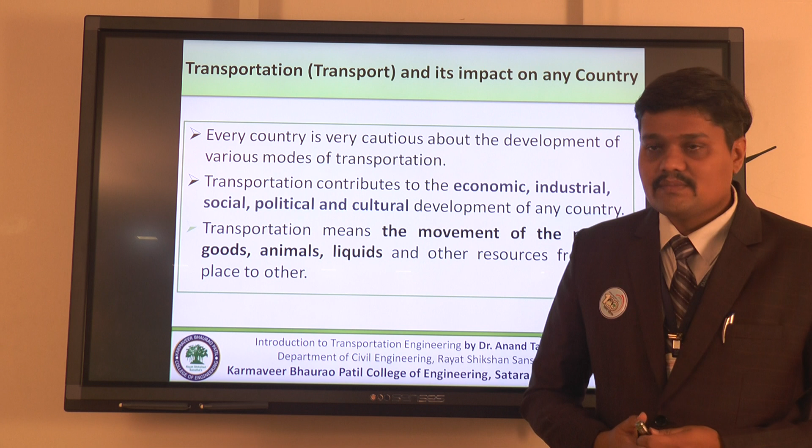We people often drink tea, we drink coffee, we export a number of things, we import a number of things to the state, to the districts, to the country, world over. Do you know exactly what transportation stands for? We all should know what exactly transportation means. It is the movement of people, goods, animals, liquids and other resources from place to place.

Well, I was talking about drinking tea in Satara district. We all are aware that tea, the main product, originates from Assam, and we are having it in Satara district of Maharashtra state. Likewise, there are a number of things that we are exporting from the state of Maharashtra, from our country to other neighboring countries. Ultimately, transportation contributes to the economic, industrial, social, political and cultural development of any country. So every country is very cautious about the development of various modes of transportation.

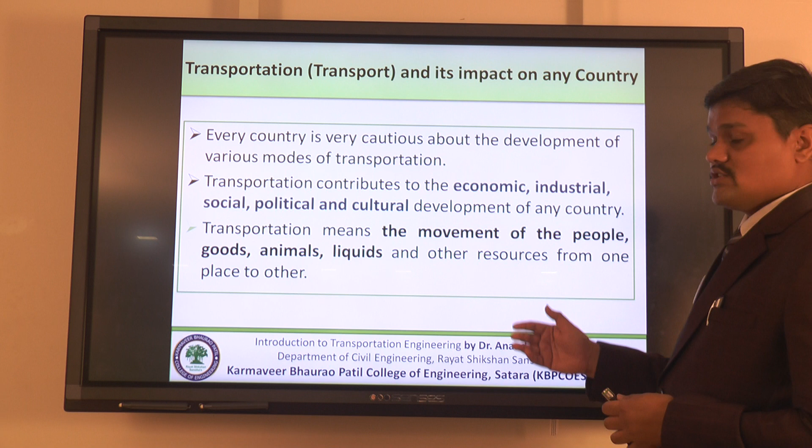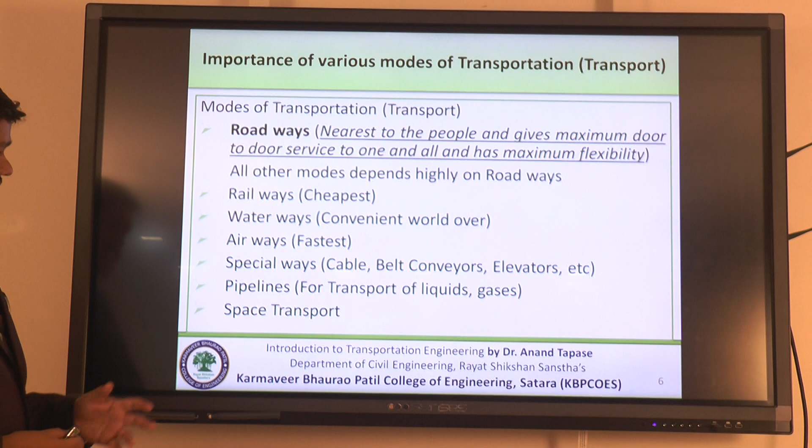Dealing with transportation, it has a number of different modes. To start with, we have roadways, we have railways, we have waterways, we have airways, and special ways like belt conveyors, elevators, cables, pipelines, and we all are aware about space transport.

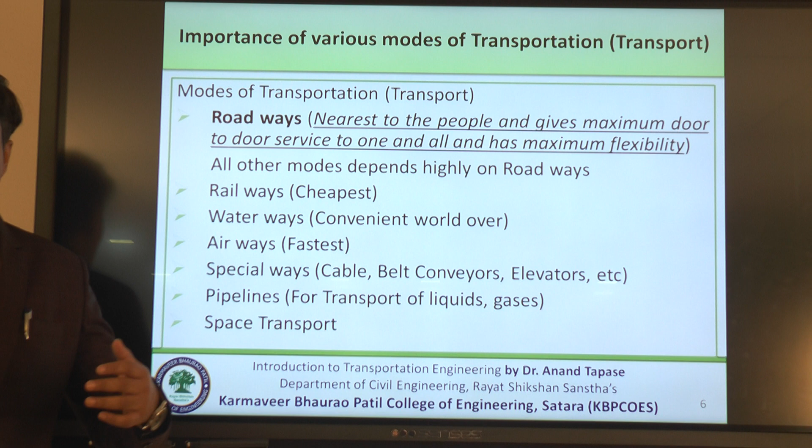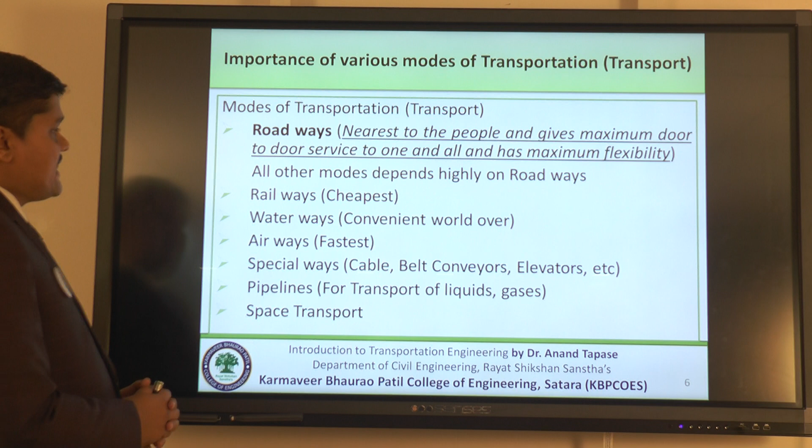Out of all the modes, we should recognize road transport as the most important mode of transportation, as all the other modes are highly dependent on roadways. If I want to go to China or America, I have to take a flight. If I have to go to another state like Delhi or Karnataka, I want to go by railway. It is impossible for me to hire a railway or an aeroplane from my house itself. So the basic need is road transport to the airports and to the railway stations.

So roadways are the nearest to the people and definitely the most important; it is the maximum door-to-door service provider and it has maximum flexibility.

Talking about railways, they can be elevated, surface, or underground. There are different forms of railways that today we are aware about. We are going towards the era of bullet trains. We have seen monorails. We are always aware about the general railways.

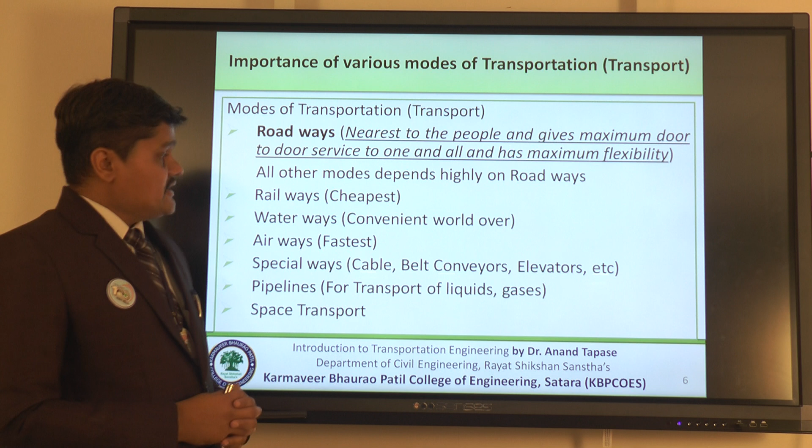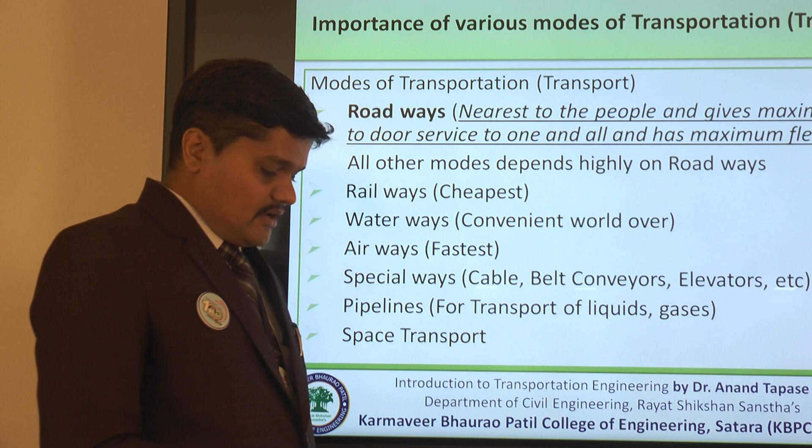The third one is the waterways. We all are aware that more than 70% of the globe is covered with water. We have a number of inland water bodies, and those water bodies can be used as a means of transportation. So waterway is one of the convenient modes of transportation worldwide.

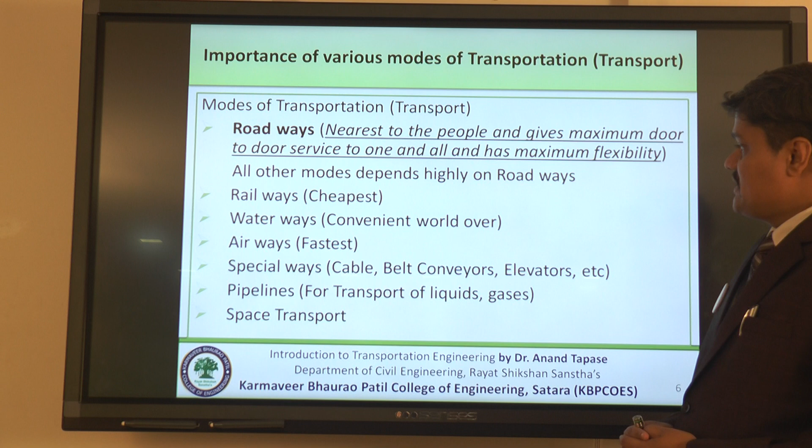Airways, definitely we cannot forget about airways. It is the fastest means of transportation. Special ways like cable, belt conveyor, elevators are designed for specific purposes. They are responsible for a particular locality.

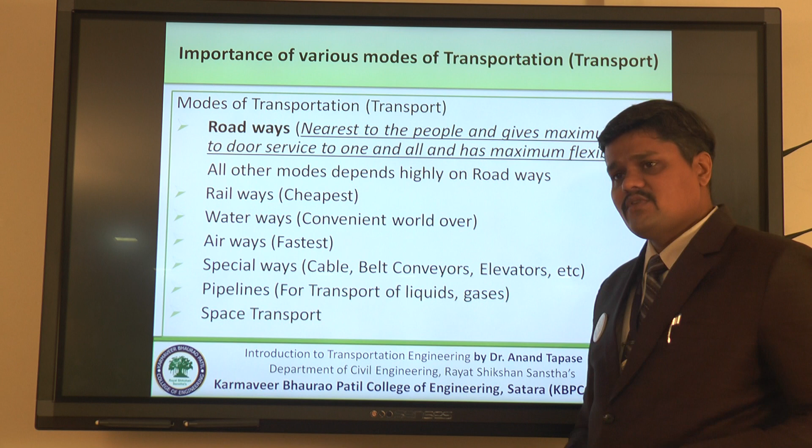Pipelines. We are talking about the various means of transportation where not only people or goods, we are also talking about the transportation of oil, liquids, gases and other aspects. So the pipeline is one of the major modes of transportation that covers the transportation of liquids and gases. Space transport we are definitely familiar with.

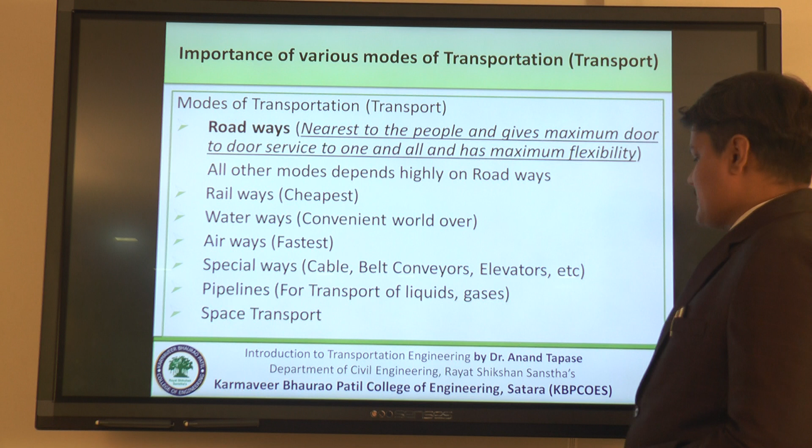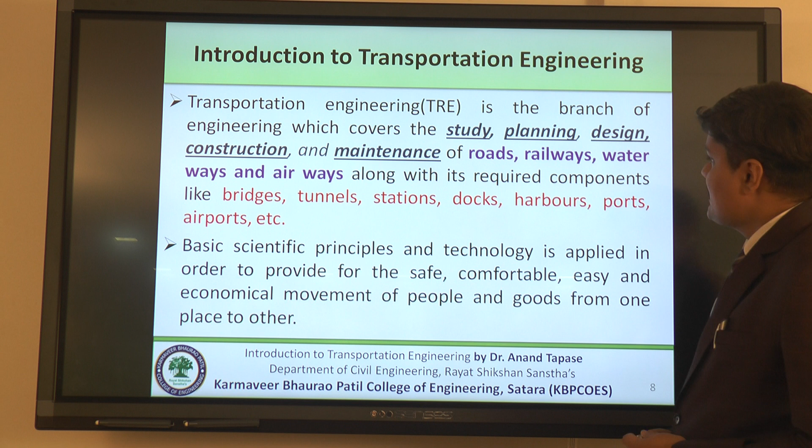In today's lecture, or as per the scope of our subject, transportation engineering, we will be focusing our attention specifically on highways. We will be dealing with the railways, we will be dealing with the airports. Likewise, what transportation engineering is and how transportation has relevance, we will discuss herein.

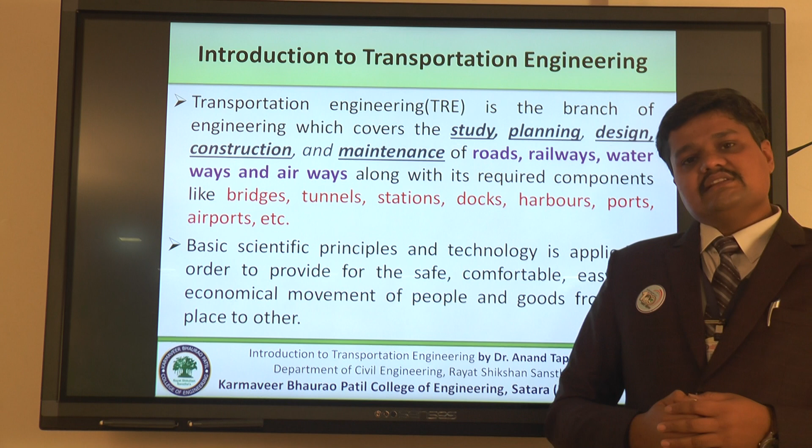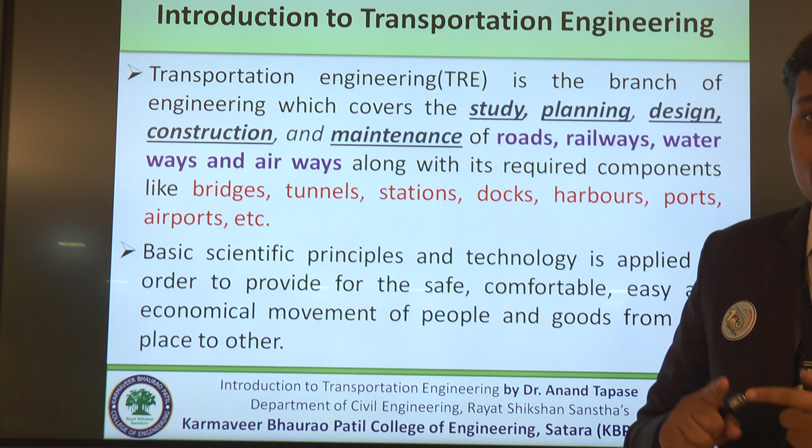What is transportation engineering? Transportation engineering is the branch of engineering which covers the study, planning, designing, execution, that we call construction, and the maintenance of roads, railways, airways, waterways, and the various ways along with the required components like bridges, tunnels, stations, docks, harbors, ports, etc.

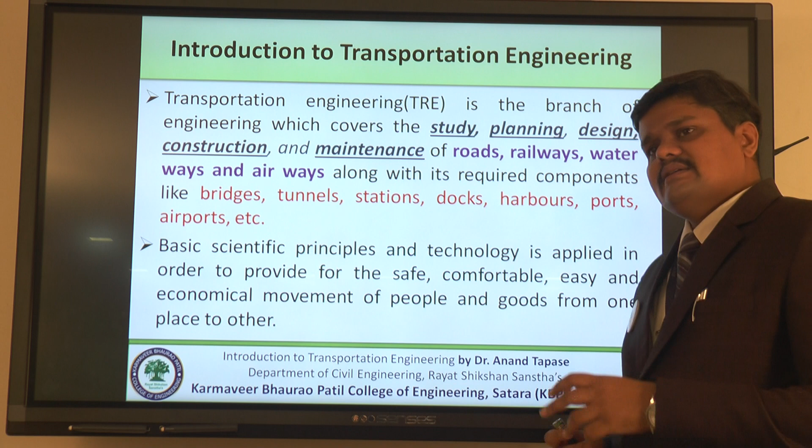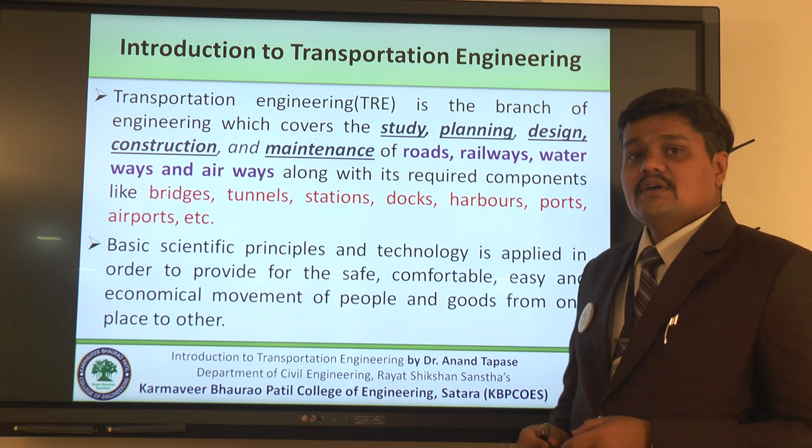We all are aware that engineering is the applied scientific principles and technology. Here in case of transportation engineering, the basic scientific principles and technology are applied for the safe, comfortable, easy and economical movement of people and goods from one place to the other.

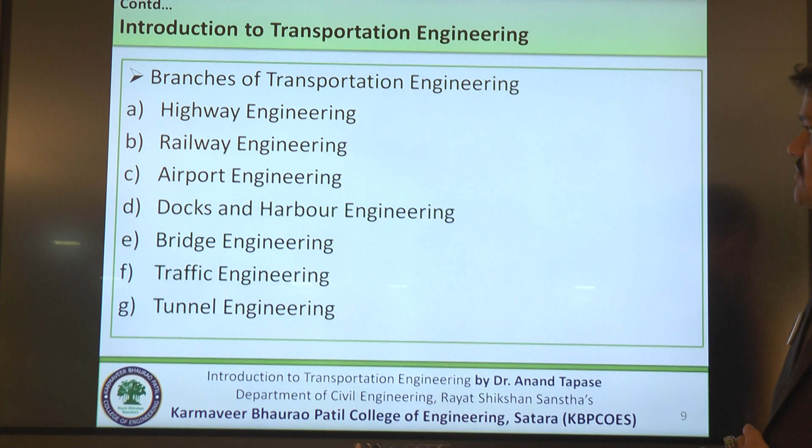Transportation engineering covers various sub-branches like highway engineering, railway engineering, airport engineering, docks and harbor engineering, bridge engineering, traffic engineering and tunnel engineering. Dear students and respected audience, we will be dealing with highway engineering as the primary subject, the first section of the course. Then we will focus our attention on railway engineering, airports, docks, harbors, bridges, traffic and tunnel engineering.

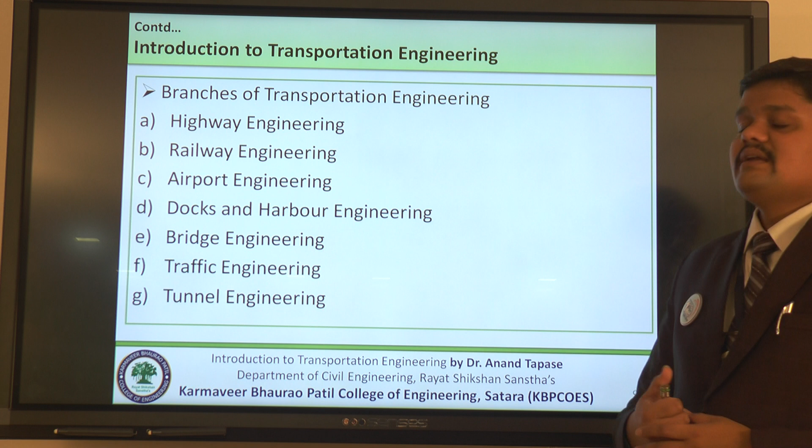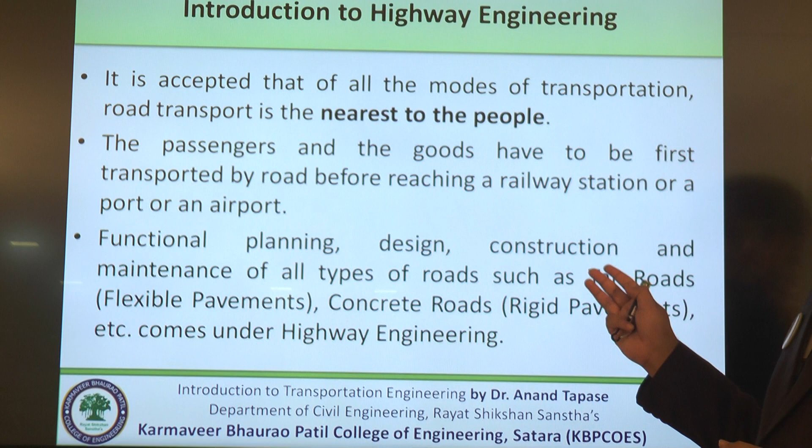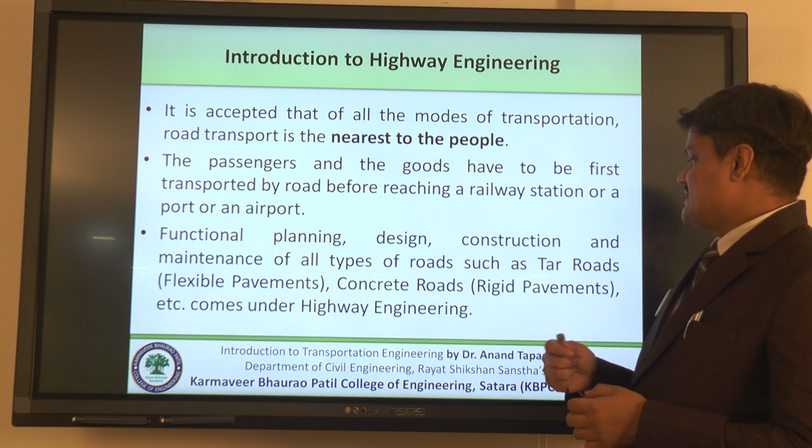Now, to start with the first mode of transportation, highway engineering, we will deal with it in detail. It is the nearest to the people, as I have already talked about. Functional planning, design, construction and maintenance of all types of roads, such as tar roads, which are called flexible pavements, and concrete roads, that is rigid pavements, come under highway engineering.

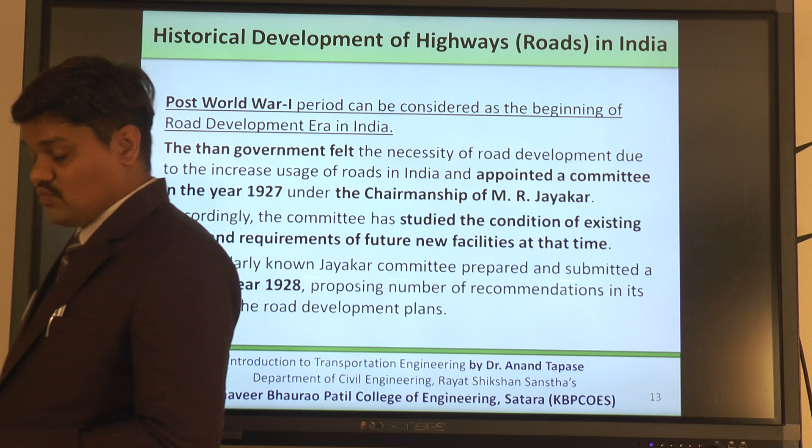Well, it is World War I which was responsible for this development. The post-World War I period can be considered the beginning of the development of roads in India. The then government felt there was a need for development due to future and current usage. So they appointed a committee under the chairmanship of Mr. M.R. Jayakar in 1927. The committee studied the conditions of existing roads and the requirements of future new facilities at that time.

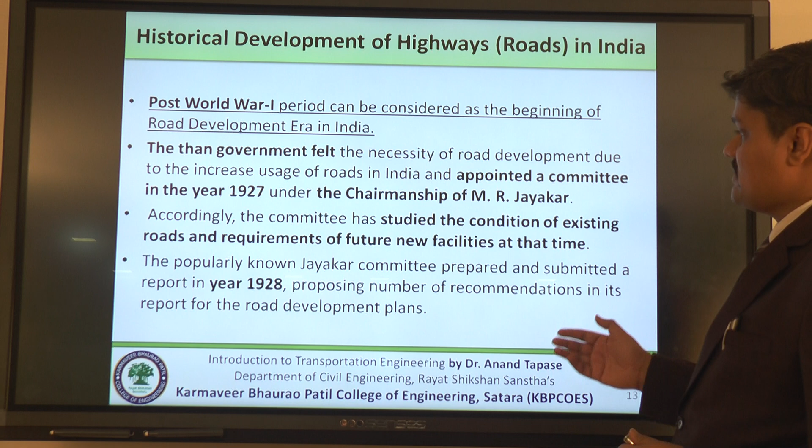The committee took around one year for submission of its report. So in 1928, they submitted their report based on the study of the conditions of the existing roads and the future requirements. The committee recommended a number of points, and they were really very valid, and the recommendations that the Jayakar committee proposed we will discuss in detail.

The first was that the central government should consider road development as a national interest and should take charge of road development. So the first recommendation of the Jayakar committee is that road development should be considered an important aspect of national development. The second: for the development of anything we need funds. So a road development fund is essential, for which an extra tax on petrol can be levied from the road users.

That was the second recommendation. The third recommendation was there should be an advisory body which should be formed, which will look after various aspects, research, development of these road development plans. The most important recommendation was to form a research organization.

So accordingly, there were a number of other recommendations. Those 4 recommendations we will be discussing in detail. And based on those recommendations, what were the outcomes? Let us have an overlook. The foremost outcome based on the Jayakar Committee was the Central Road Fund, that is CRF, which was formulated in 1929.

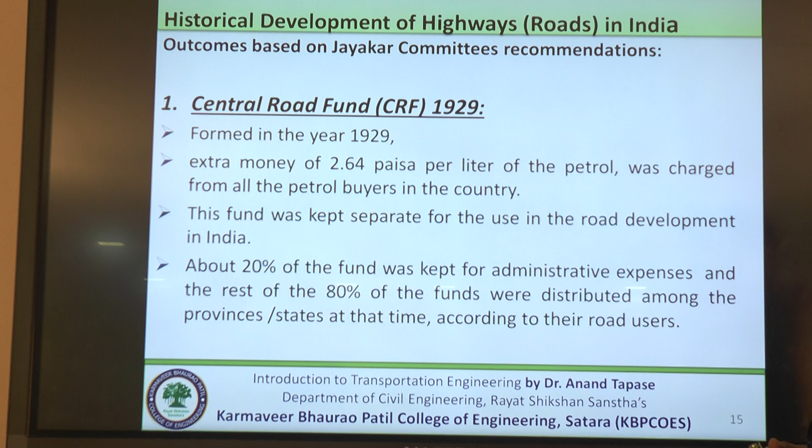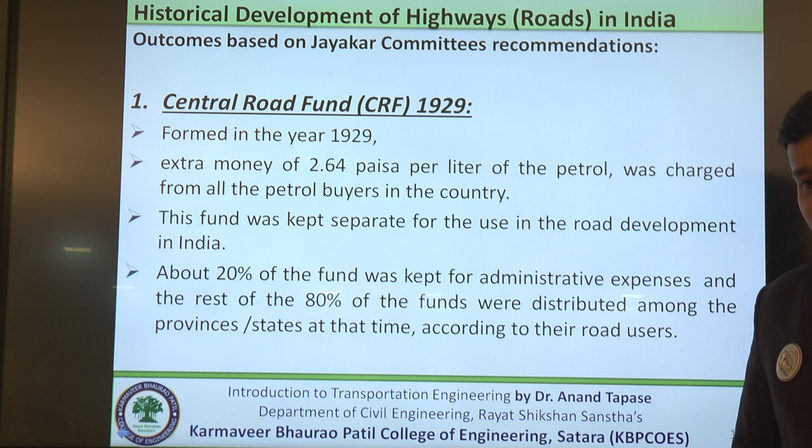Extra money of 2.64 paisa per liter of petrol was charged from all the petrol buyers in the country. It has generated a good corpus, out of which a 20% corpus was kept for administrative works, and 80% of the fund was distributed among the provinces, the states at that time, according to the road users.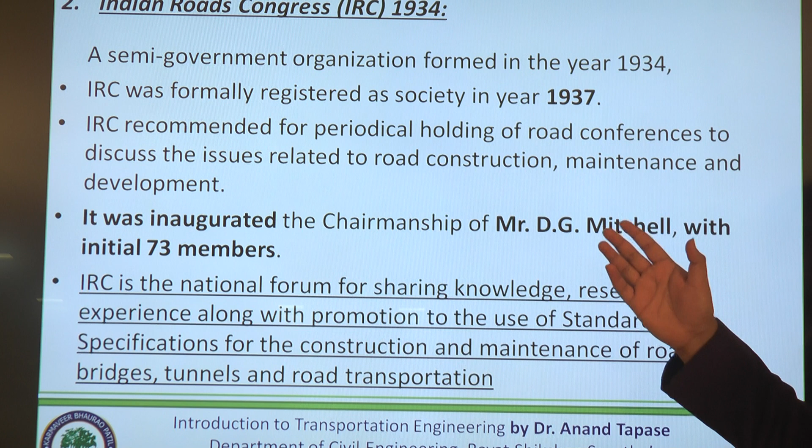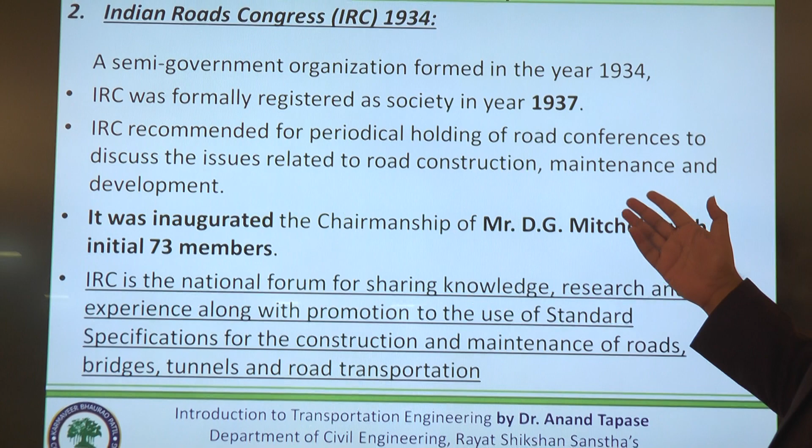The second recommendation was related to the formation of an advisory body, and it was the Indian Road Congress that came into existence in 1934. The Indian Road Congress was formed in the year 1934, which was considered a semi-government organization. IRC was registered under the Indian Societies Act 1860 in 1937. IRC recommended periodical holding of road conferences to discuss the related issues of road construction, maintenance and development.

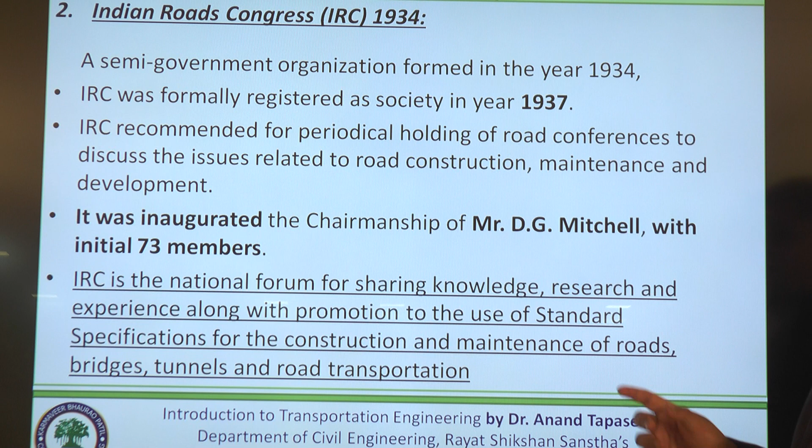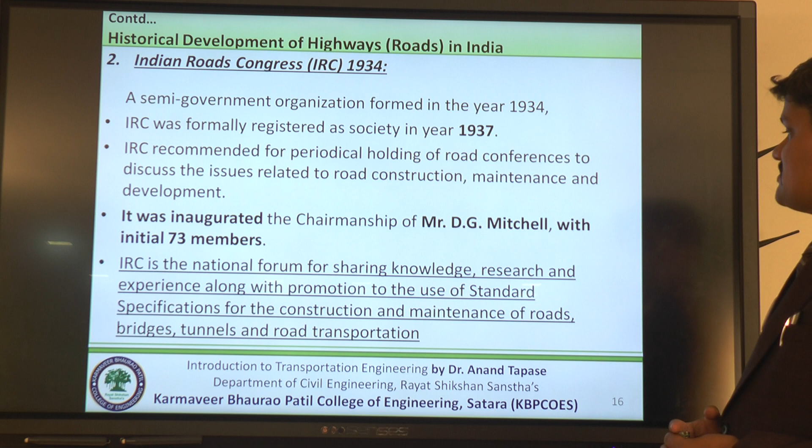In the year 1934, it was inaugurated under the chairmanship of Mr. D.G. Mitchell. Initially there were only 73 members. Now IRC is the national forum for sharing knowledge, research and experience, along with promotion of the use of standard specifications for the construction and maintenance of roads, bridges, tunnels and road transportation.

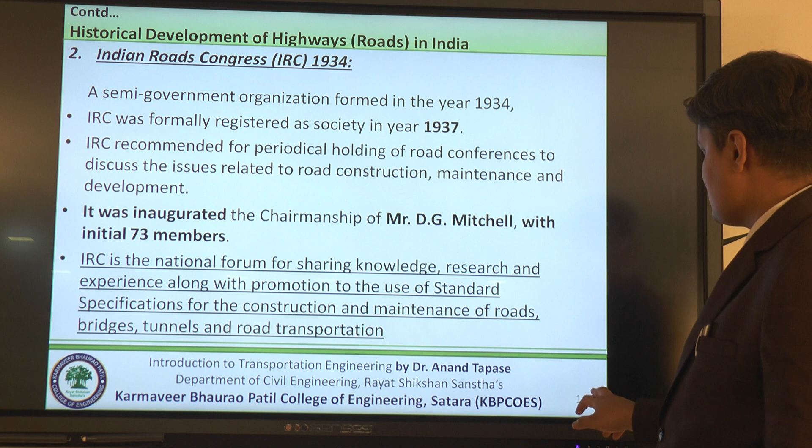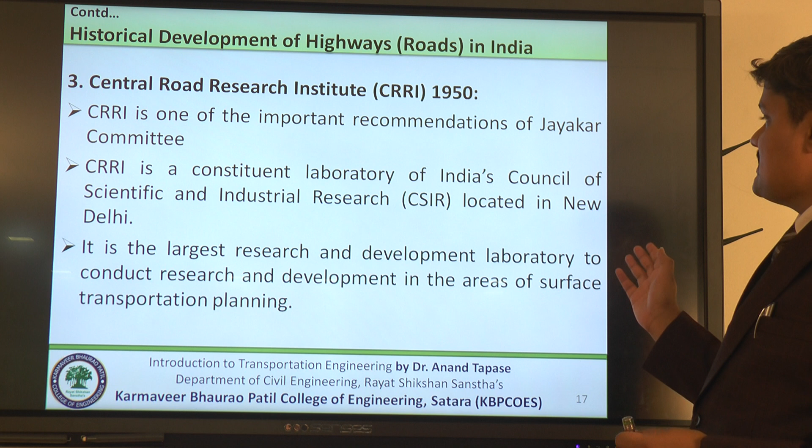The third recommendation was related to the formation of a research institute. Accordingly, in the year 1950, the Central Road Research Institute was formulated. It is one of the important recommendations of the Jayakar Committee. As we all are aware, India's Council of Scientific and Industrial Research is one of the biggest bodies, and CRRI, that is the Central Road Research Institute, is a constituent laboratory of CSIR, which is located in New Delhi.

So those were the major recommendations. Whatever things occurred were the recommendations by the Jayakar Committee. So these are the 4-5 important points that are related to the Jayakar Committee, from the formation to the development of the Central Road Research Institute.

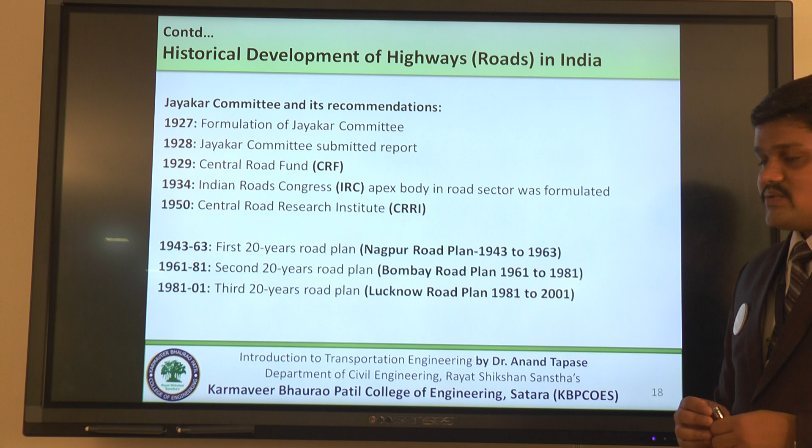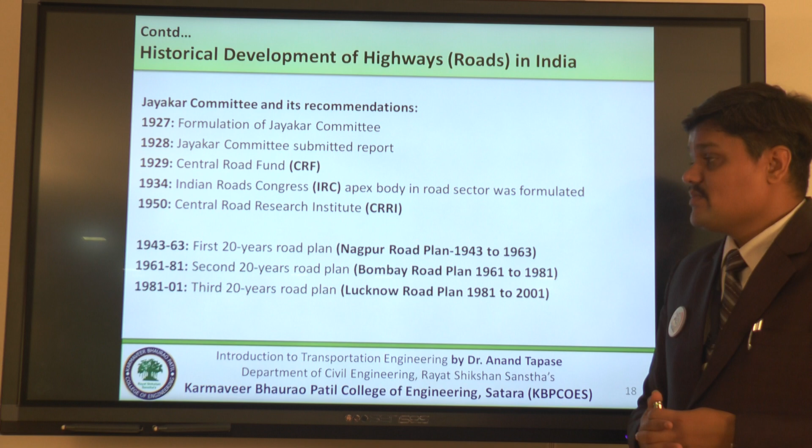We all are aware about the different plannings that are taken care of. There were 3 road development plans which were proposed. The road development plans had a tenure of 20 years, so those are called the 20-year plans. The first meeting was held in Nagpur, so the first road development plan is also called the Nagpur Road Development Plan, whose tenure is from 1943 to 63.

The second road development plan was developed in the meeting held in Mumbai. Its tenure is from 1961 to 81. And the third one was in Lucknow, so it is called the Lucknow Road Plan, whose tenure is from 1981 to 2001. There were a number of recommendations and a number of planning stages proposed in those plans.

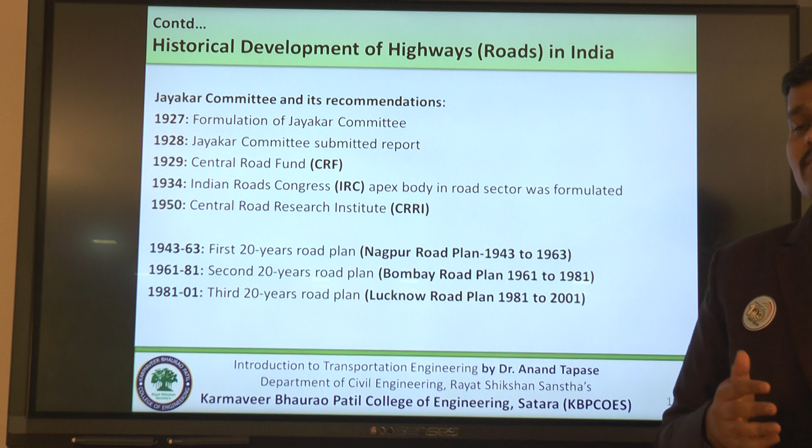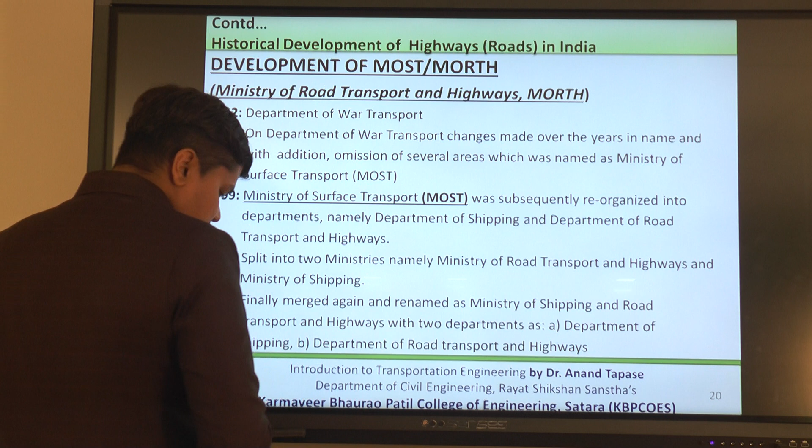Dear friends, as we were talking about the Indian Road Congress, we had a discussion about the Jayakar Committee and the 20-year plan. Now, today we are in the era of MoRTH, that is the Ministry of Road Transport and Highways. It has a very big history. The basic Department of War Transport was formulated in 1942.

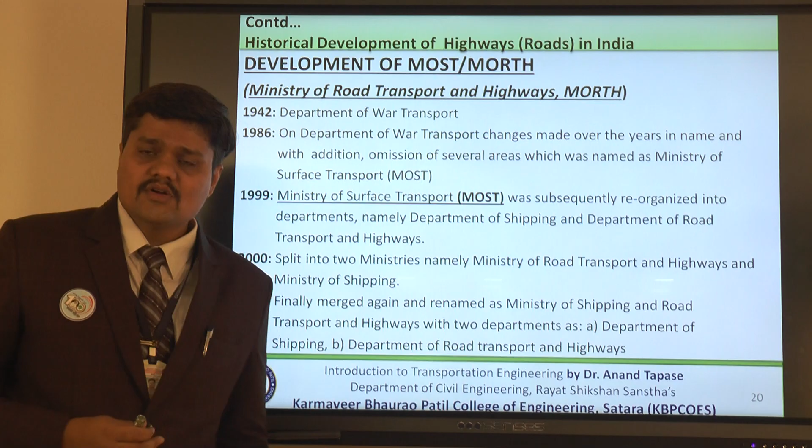Then after, there were a number of changes made over - changes in the name, changes in the areas, number of areas were added, number of areas were omitted. Accordingly, up to 1986, it was named again as the Ministry of Surface Transport.

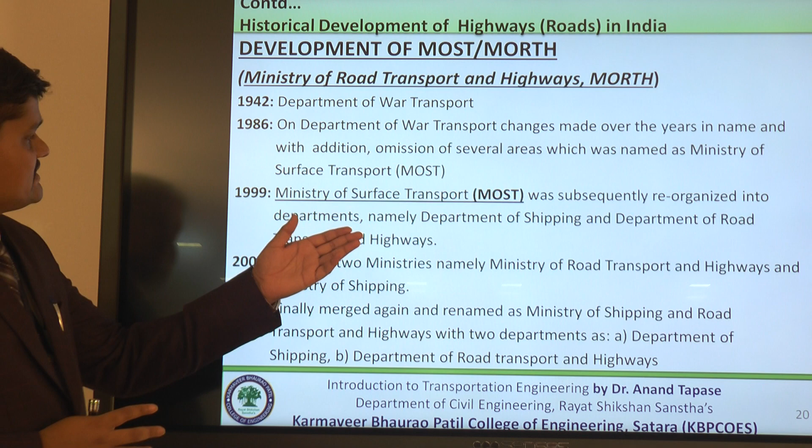After 1986, it was again renamed in 1999. The Ministry of Surface Transport was subsequently reorganized a number of times, and in 1999, it was reorganized into departments, namely Department of Shipping and Department of Road Transport and Highways.

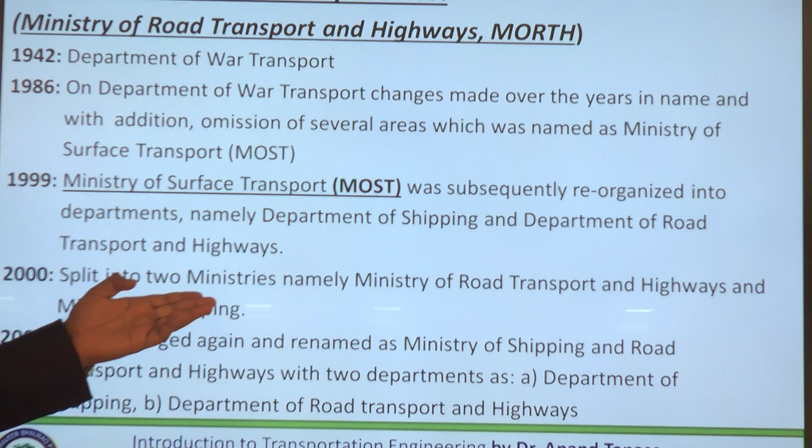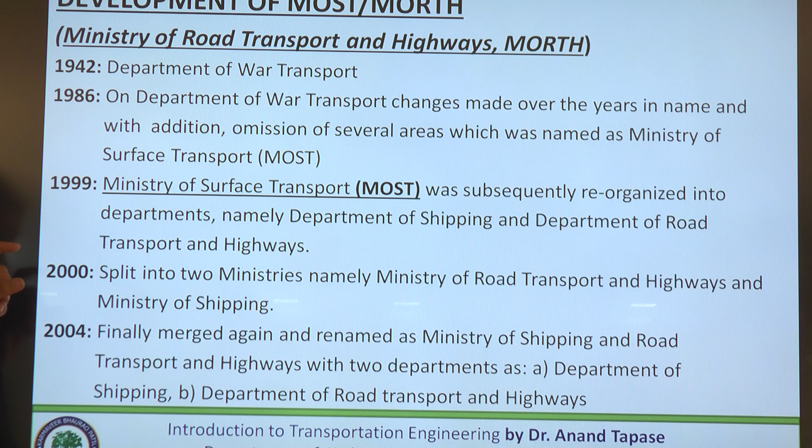Again, the same thing happened. There was a split into 2 ministries, namely Ministry of Road Transport and Highways and Ministry of Shipping, that came into existence in 2000, till 2004. It was merged and renamed as Ministry of Shipping and Road Transport and Highways, with 2 different departments - the Department of Shipping and the Department of Road Transport and Highways.

Well, as I was talking about, 1988 was a turning point when the National Highway Authority of India Act came into existence. It was really a turning point in the history and development of road transport.

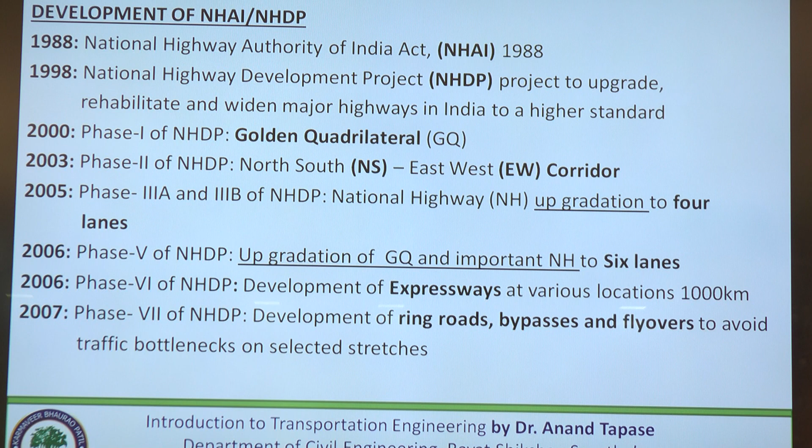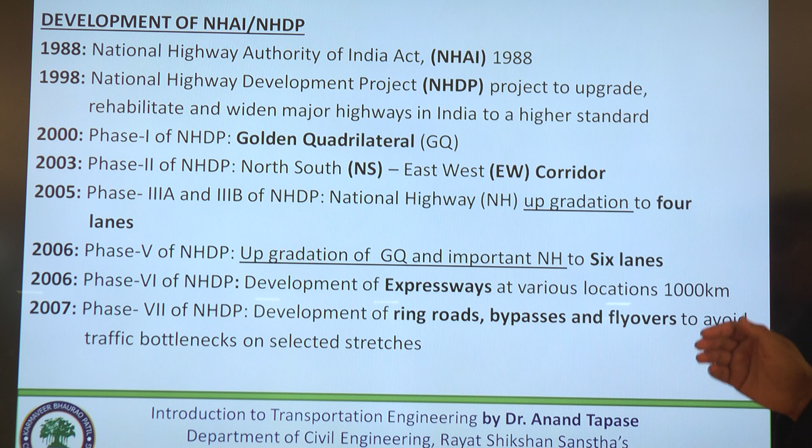In 1998, NHDP, that is the National Highway Development Project, to upgrade, rehabilitate and widen major highways in India to a higher standard, was chalked out in different phases, and the phases were dealt with.

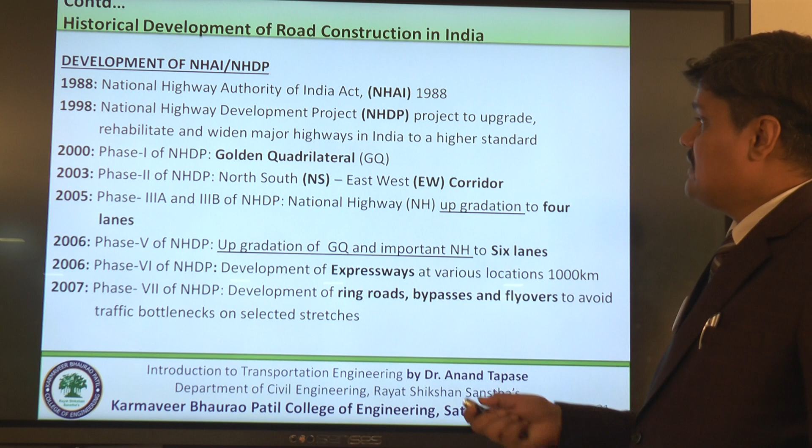The first phase was related to the Golden Quadrilateral - one of the dream projects that was initiated in year 2000. Phase 2 was related to the development of the north, south, east, west corridor, which was one of the milestones in the development of roads.

Then in 2005, the phases were divided into phase 3A and phase 3B of NHDP. National highways were upgraded to 4 laning, a change or makeover that we have all witnessed.

In 2006, phase 5 was launched by NHDP, that is the upgradation of the Golden Quadrilateral and important national highways to 6 laning.

Then phase 6 was launched in the same year, after a couple of months - development of expressways at various locations. It was in the initial stage as a pilot project, considered as 1,000 kilometers of road at different locations, planned and executed.

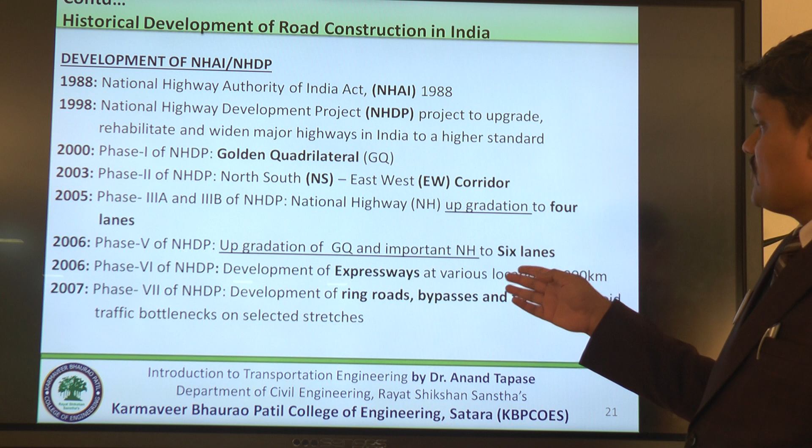In year 2007, phase 7, that is the development of ring roads, bypasses and flyovers to avoid traffic bottlenecks on selected stretches, was considered.

Dear friends, this is all about the historical background that we have encountered and dealt with. I have tried my best to focus on all the points in detail. We all travel on the roads, we all go to the offices, we all go to the villages, and we encounter different types of roads.

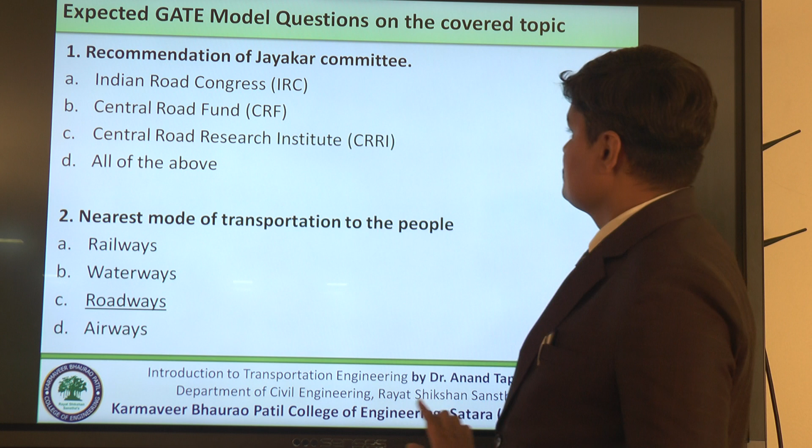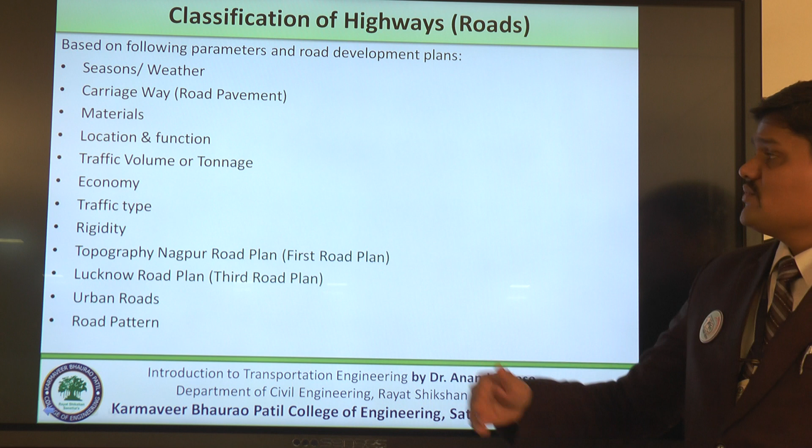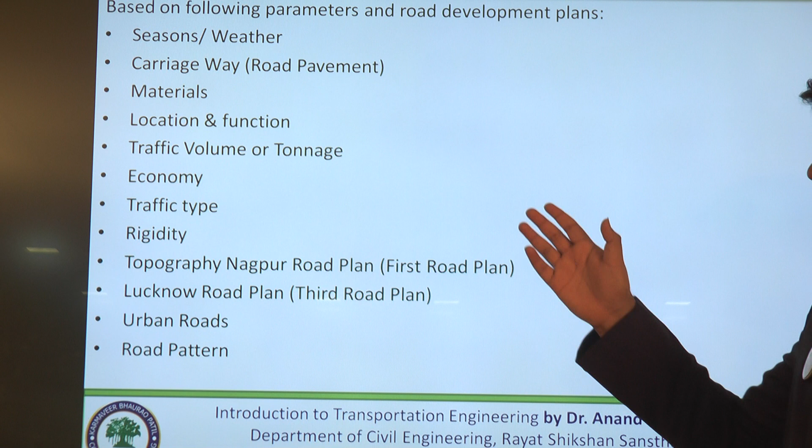So the roads are being classified based on different aspects and various parameters. The first one is the season and the weather. Second one is the carriageway, that is the road pavements, the materials that we are using, location and functions, traffic volume or tonnage, economy, traffic type, rigidity, topography.

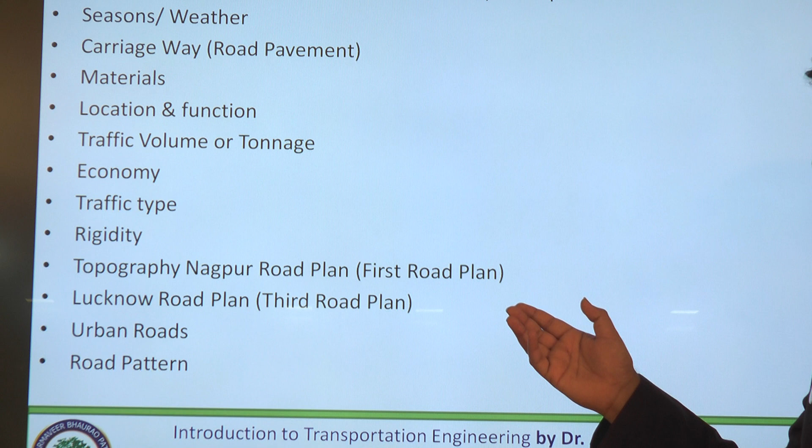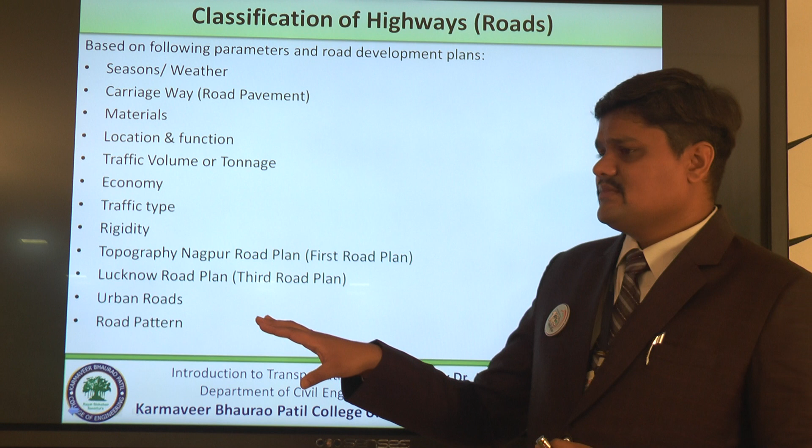That is based on the Nagpur road plan. Then after development plans, that is the Nagpur road plan, Lucknow plan, urban roads and road patterns. We are just aware about a concrete road and a tar road, that is the bitumen road. Also one of the roads that we are familiar with is the road constructed of murum.

But dear friends, the roads are classified in different aspects. This is the broad vision that I am going to focus on.

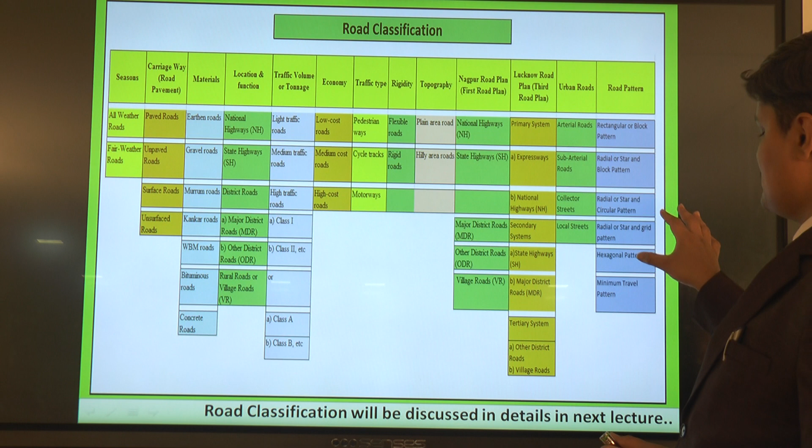This detailed classification that we are going to see in the next lecture, in much detail.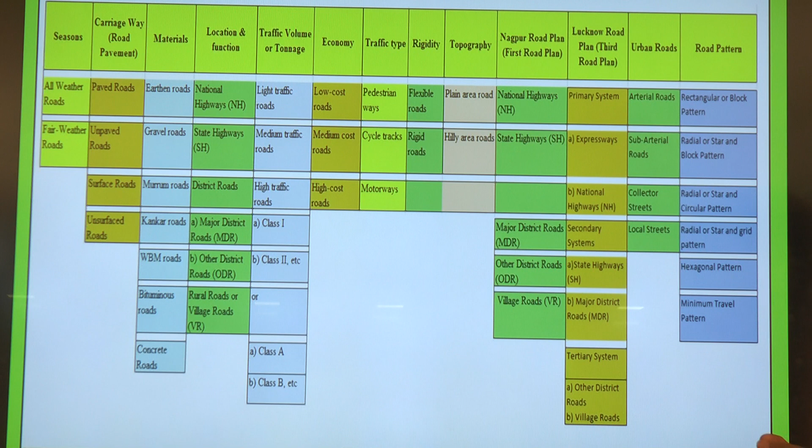Here the road classification, as I have talked about the seasons, that is the all weather roads and the fair weather roads. The carriageway, that is the road pavement, paved road, unpaved road, surfaced road, unsurfaced roads.

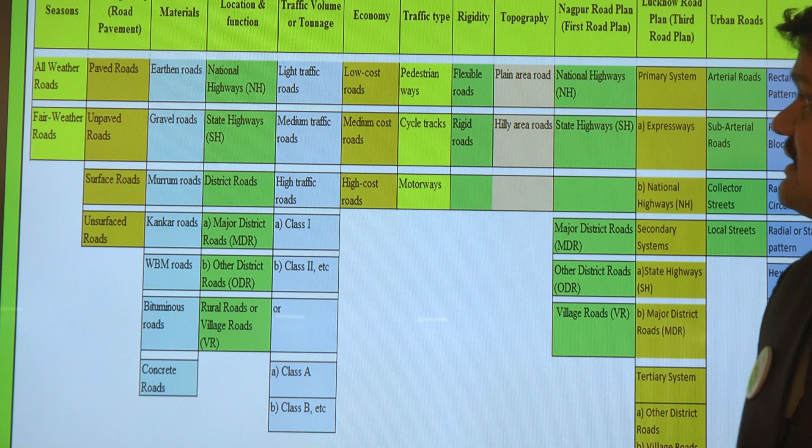As per the material, it is the earthen roads, gravel roads, murrum roads, kankar roads, WBM that is waterbound macadam roads, bituminous roads and the concrete road, based on the materials used in construction of the road. About the location, we people are aware.

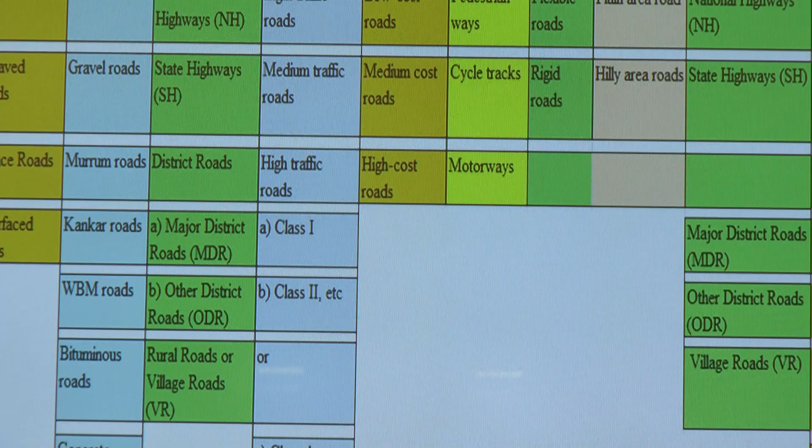To give a brief idea, connection of state to state is done by the national highways. The state highways have a different function, connection of district to district. Then there are district roads, major district roads, other district roads, rural roads. We are going to deal with this in much detail in our next lecture.

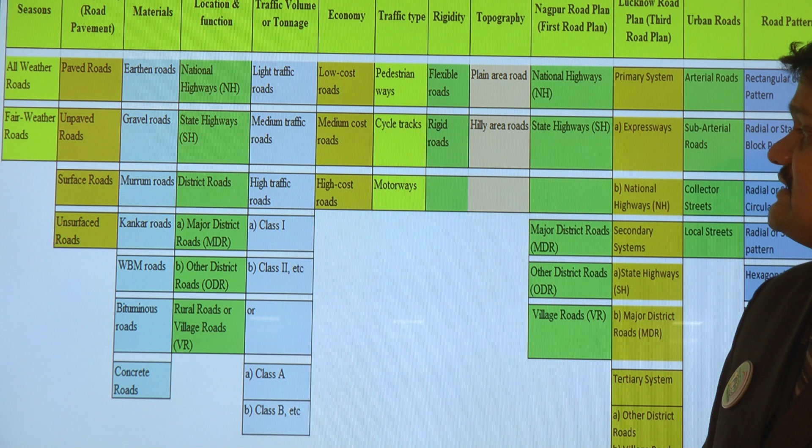About the traffic volume or tonnage, there are light traffic and medium traffic roads. About tonnage, it is class 1, class 2, etc. It can also be considered as class A, class B, and so on. About the economy, there are low cost roads, medium cost roads, and high cost roads.

About traffic type, there are pedestrian roads, cycle tracks, and motorways. Rigidity is the governing strategy we are focusing on, that is whether the road is a flexible road or whether the road is a rigid road.

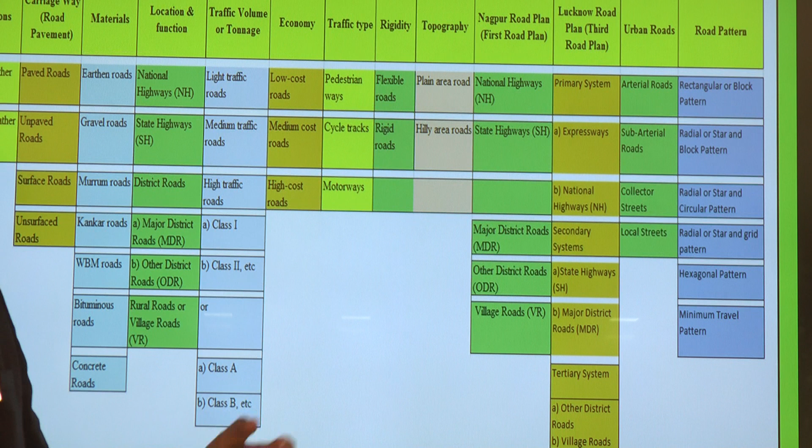Generally flexible roads are constructed with the help of bituminous material and rigid roads are constructed with the help of concrete. Then there is topography, whether the road is on plain topography or in a hilly area, so accordingly we have plain area roads and hilly area roads.

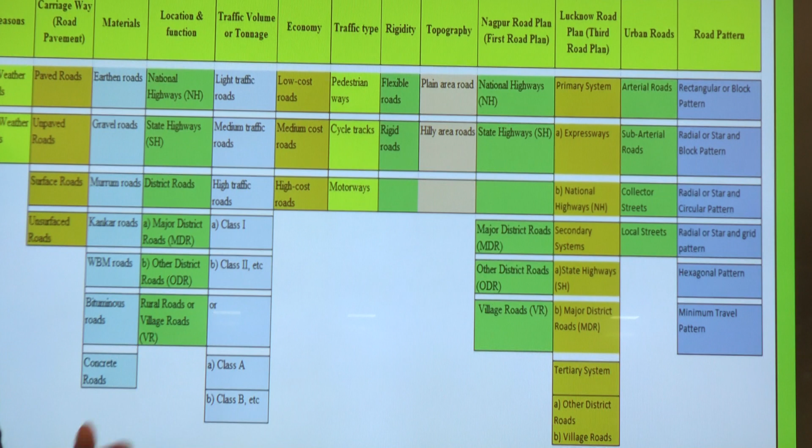The 20-year plan, the first 20-year plan, proposed a brief classification of roads, and it is also called the classification of the Nagpur road plan.

National highways, state highways, major district roads, other district roads, and village roads was the classification according to the first road development plan. In the Lucknow plan, that is the third development plan, it was converted into three major parts: the primary system, secondary system, and tertiary system.

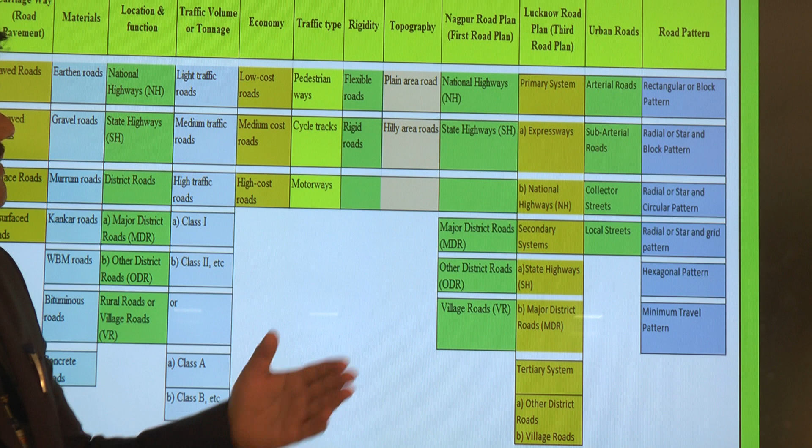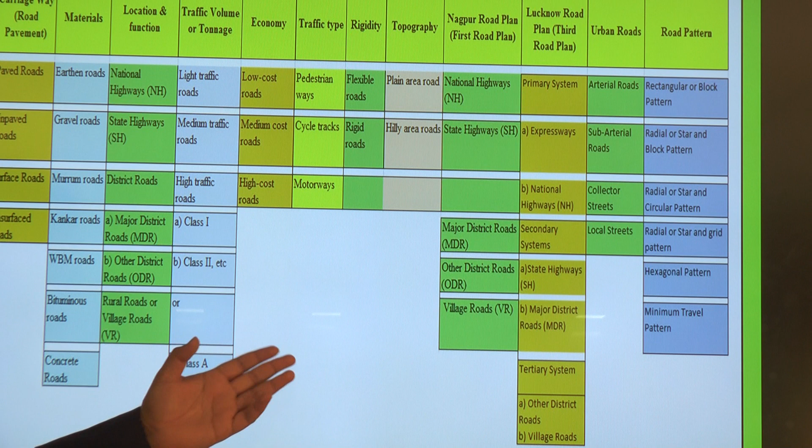In the primary system, expressways and national highways were covered. In the secondary system, state highways and major district roads were covered, and in the tertiary system, it was focused on village roads.

Urban roads: arterial roads, sub-arterial roads, collector streets, local streets.

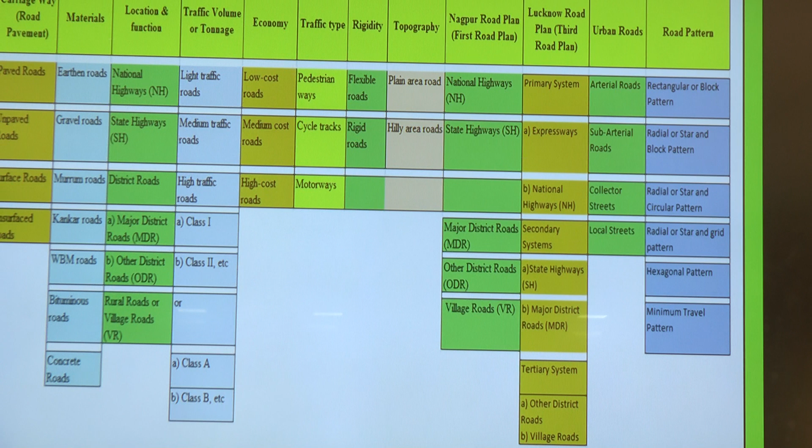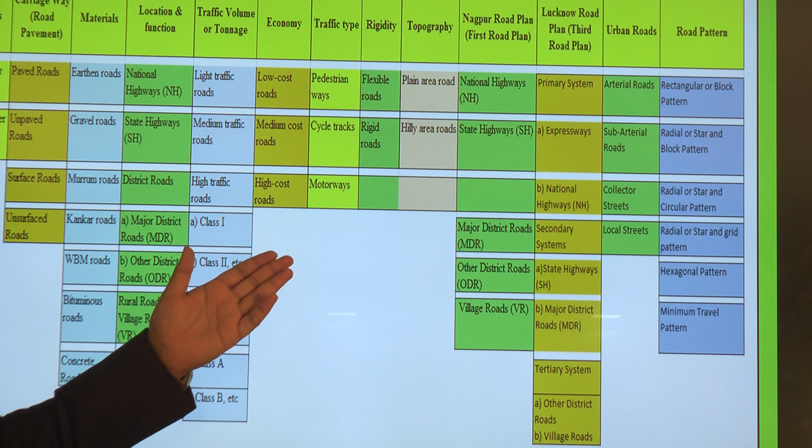About the road pattern: rectangular or block pattern, radial or star and block pattern, radial or star and circular pattern, radial or star and grid pattern, hexagonal pattern, and the minimum travel pattern.

We will be discussing this in detail in the next lecture.

In today's lecture, what we have covered, we should have a focus about. We will summarize the things we have covered.

Here we have seen, from the lecture we are now able to comprehend the historical development in highway engineering and got introduced to transportation engineering and its basic concepts. Also the classification of roads was briefly dealt with, which we have discussed.

Focusing on the next lecture, what we are going to see is we will learn the detailed classification of roads. We will deal with road planning, alignment, and survey as per the scope and syllabus concerned.

We have seen the various aspects of transportation. We have dealt with highway engineering in much detail.

Here, what are the expected questions on the topics covered till today, whatever we have seen. Explain briefly about the key historical developments in road transport in India. What are the recommendations of the Jayakar committee? Define transportation engineering, explain the importance of various modes of transportation that we have seen.

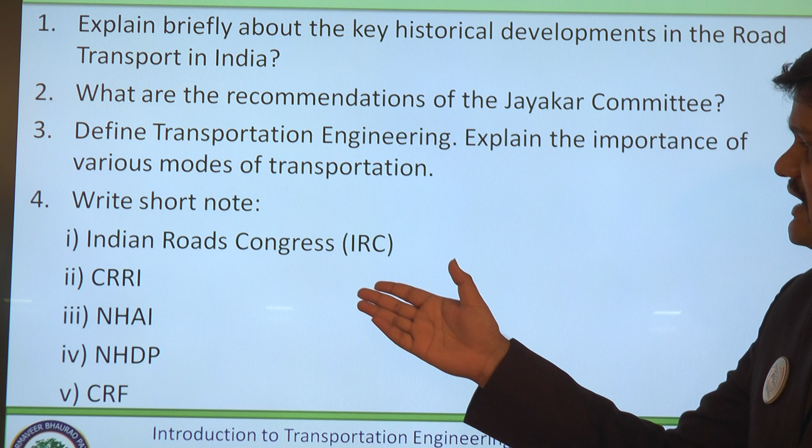Maybe short note type questions can be asked on Indian Road Congress, CRRI that is the Central Road Research Institute, NHAI that is the National Highway Authority of India, second is NHDP that is National Highway Development Project, and CRF that is the Central Road Fund.

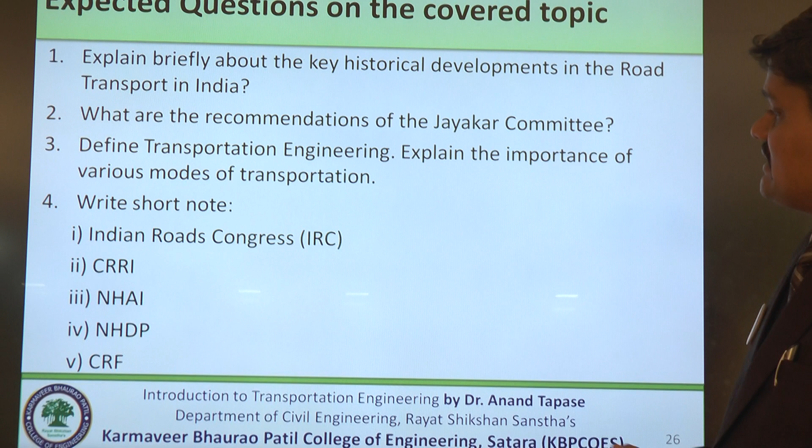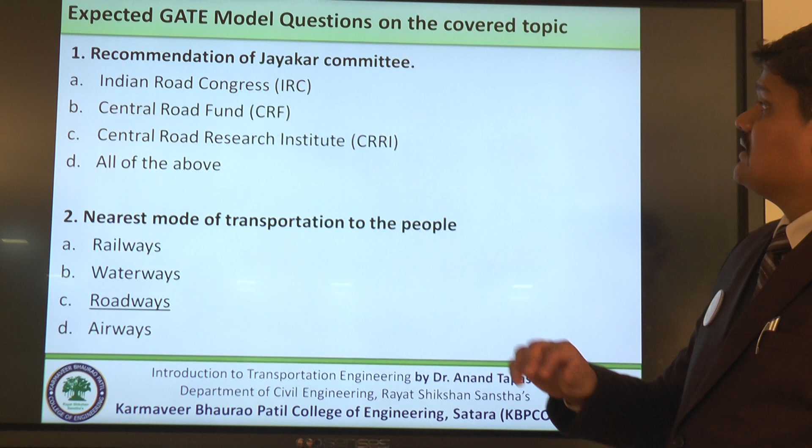Those are the most likely brief questions. About GATE model questions, one may ask a question like the recommendation...